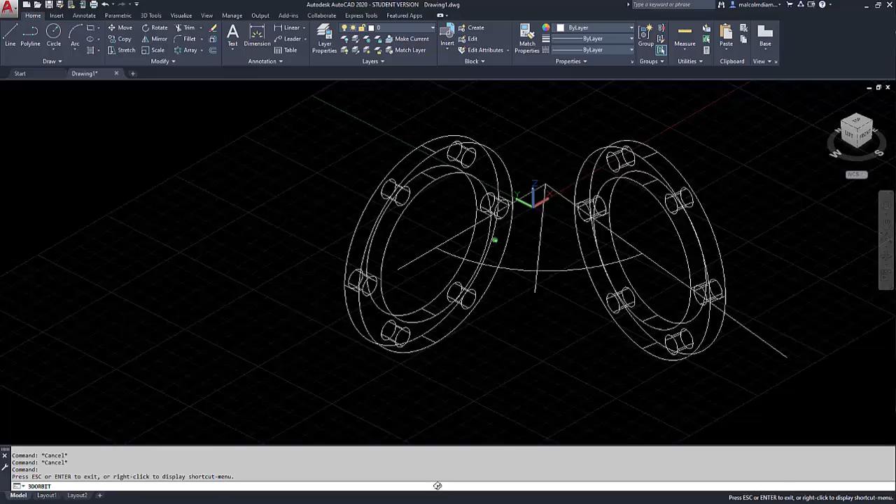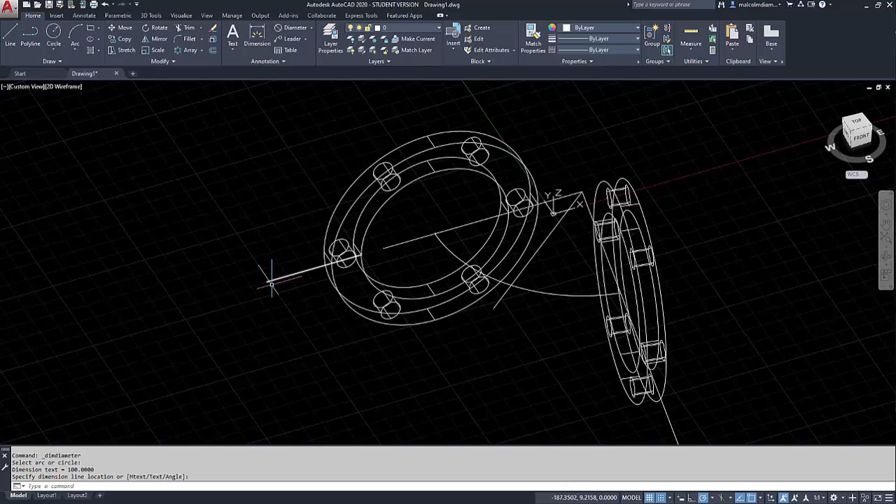Now, because I've not got a drawing to work to, and being an idiot, I did not write down what this thing is, this circle. So I'm just going to do a little dimension on there. You don't have to do this part, that's me being an idiot. What is the inside of that circle? Dimension line location.

100. Right, okay, so the inside of that is 100. So I'm just going to draw. You can just put these things back flat to the screen. It doesn't really matter. In fact, I'm going to do it flat to the screen.

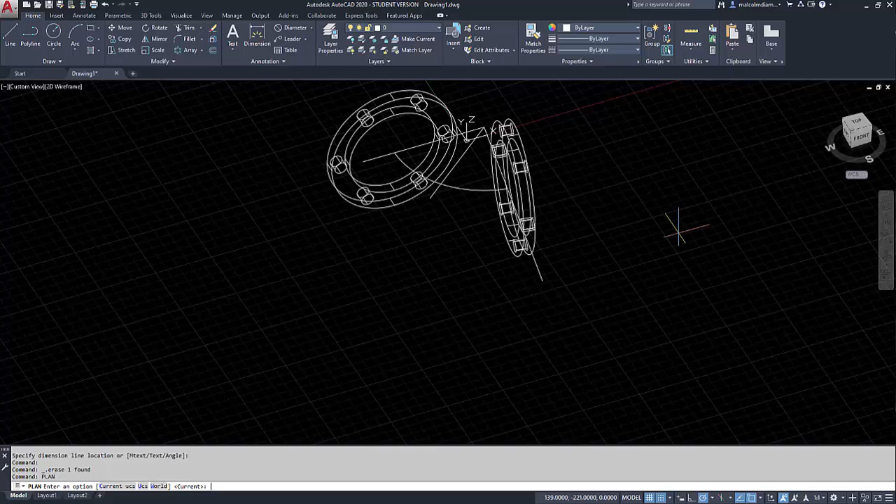If you ever get lost in your UCS and everything else, just type in PLAN, enter, enter. Now you can see something like the handout. You've got your two flanges, they're in position, and you've got this piece of arc, which is the center of your circle in between.

Now, I'm going to make this quite thin-walled because I didn't really think about it much, and I'm just making these numbers up as I go along. So on here, I'm going to move that thing out, and I'm going to do my 50, which is half of 100. All right, so there's my first part of my pipe.

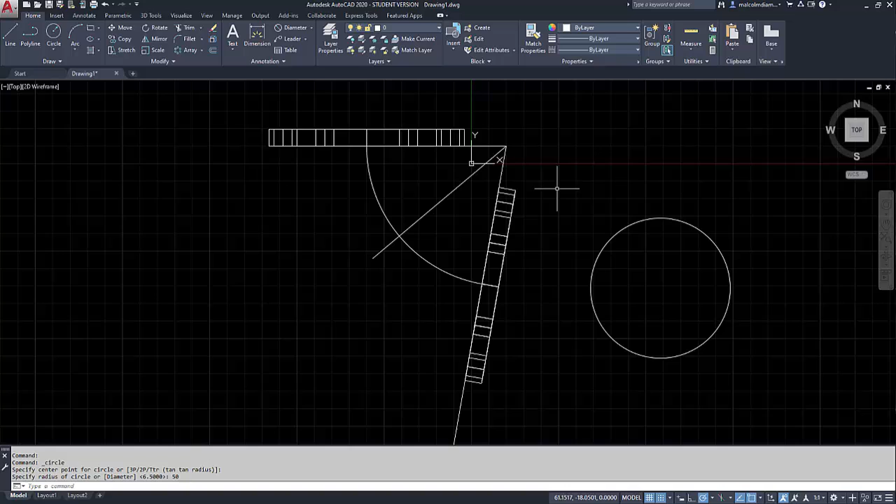And the second part of my pipe, and I might have made these holes a little bit too large. I'm going to put these two big thick flanges on an eighth wall tube. I can do the tube quite simply, see, an eighth wall tube would be 3.2, so I'm just going to do 3 millimeter.

I'm just going to do an offset. I'm going to say 3, then enter. I'm going to left click and I'm going to click again. So you can see my tube is pretty thin. All right, it's pretty small.

Now, how do we get this onto there? Because that's all we really need to do. Then we can get rid of the rest of our construction lines. And basically, apart from a little bit of finagling, we're kind of done, right?

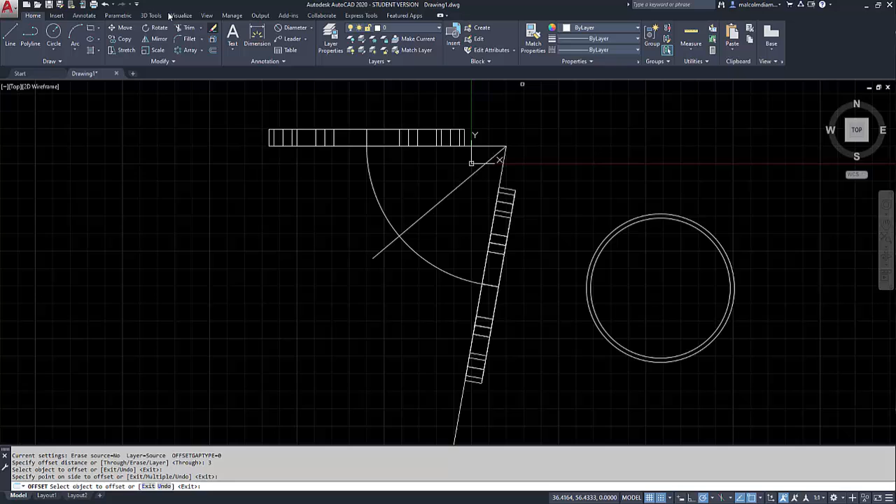So it's an even simpler task. Because I don't know if you remember when we were looking at the sweep command, we were playing around a little bit in one of the classes with the sweep command. That's all we need to do.

We can grab an object, which is a 2D object, and it will be, once it's swept, any shape, and we can path it down an object, which in this case is just that little quadrant that we cut out of our circle, or not quite a quadrant.

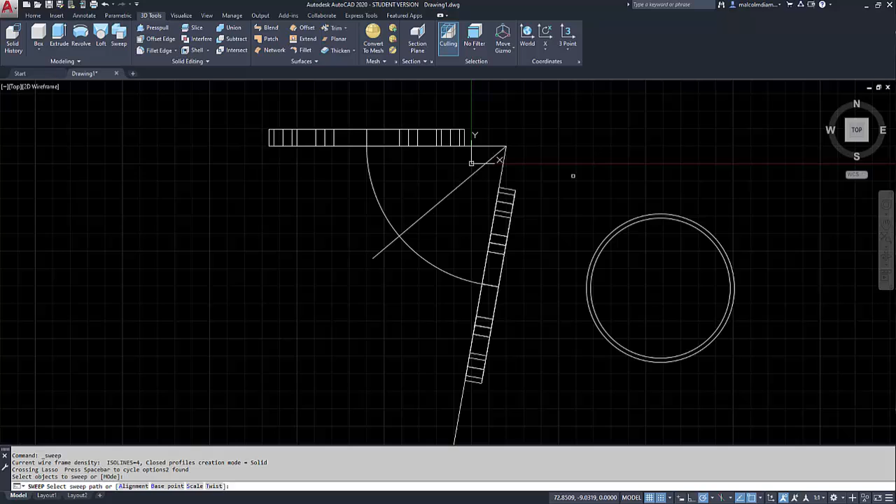So I'm just going to hit the sweep command, and it says select the objects you want to sweep. Well, it's those two. Then I hit the right hand mouse click and enter, and then where is the path is what it's asking for. Well, it's kind of that one.

How simple was that? And yes, it's finished apart from putting a little flange stick out on this bottom edge. Okay, so let me just grab this and turn it around and show you. It really is finished. It's a 3D tube.

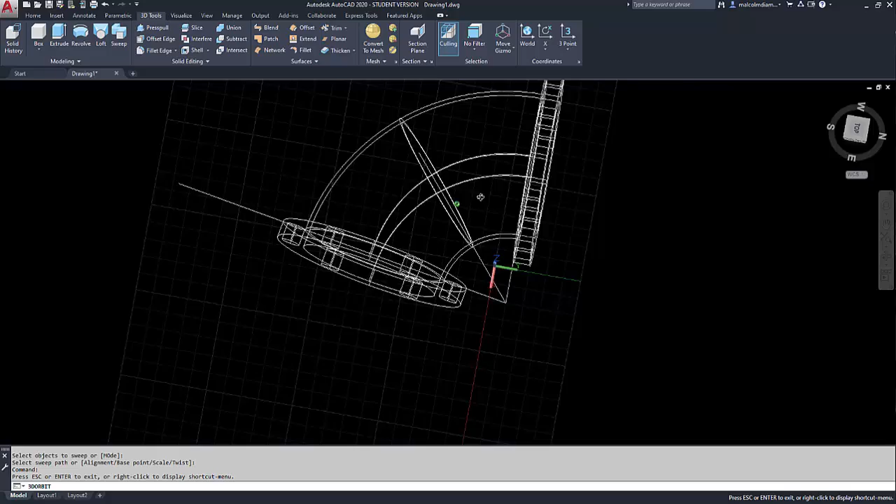The only thing we're going to do is take out the center part. What do I mean by taking out the center part? Well, if you look at it, the outside tube has to have the inner tube taken away from it.

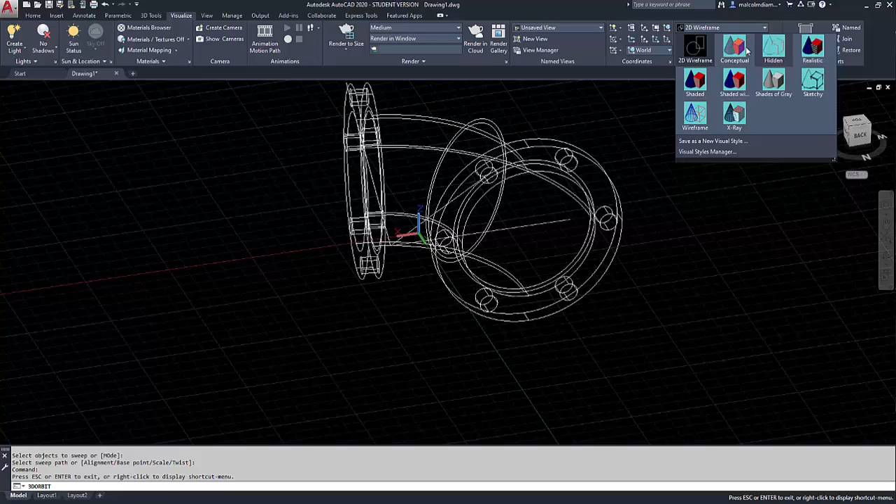So I'm just going to do a subtraction, and let me just put you into visualize first so you'll see what I'm on about. Okay, there is realistic. You can see it's solid at the moment. It's a tube. It's a 3D flanged tube, but it's solid at the moment.

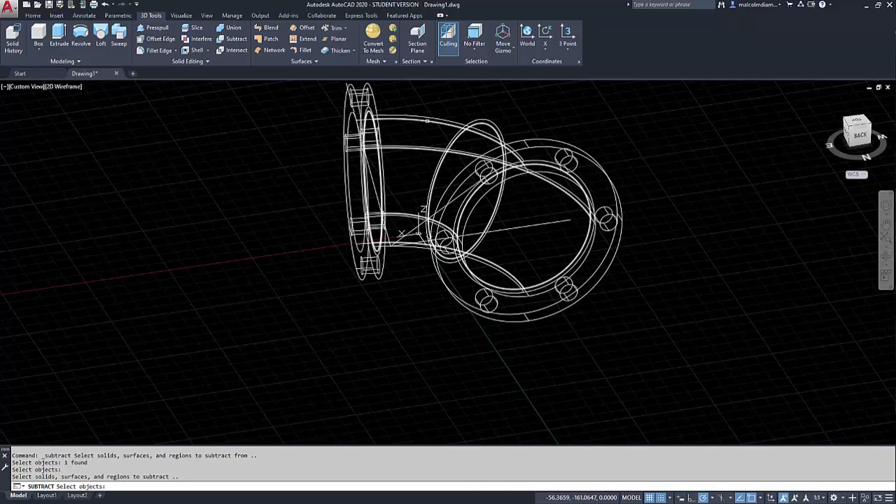So take it back to that. We need to do a subtraction just to get the inside of the tube out of the outer side of the tube. So we do subtract, and we say, right, well, that was our outer edge. Left click, right click, and then left click the inside edge, then right click. Now when you go back and you look in the realistic, we've now got a pipe. We've taken the inner away from the outer, and that is our pipe.

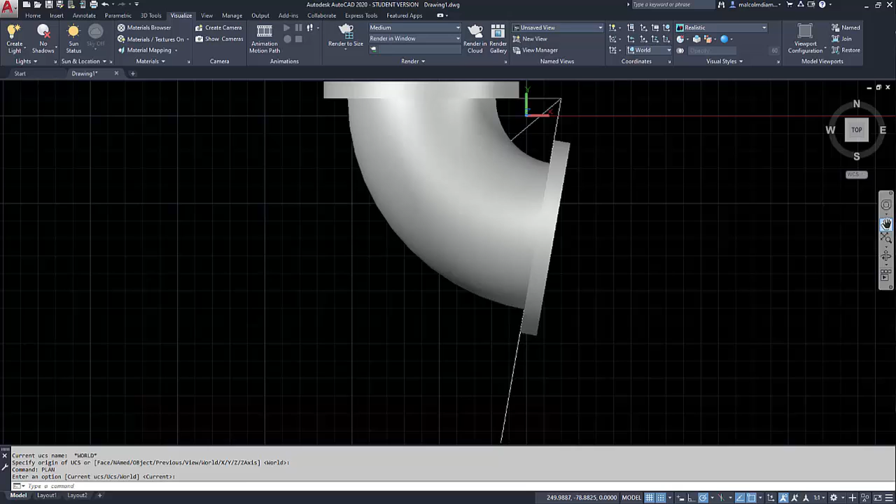Cool, huh? Okay, so now that I've turned it around and I don't know where I am, remember, just do UCS, enter, enter, and that will put us back to the world. Then plan, PLAN, enter, enter. That will give you it back in straight Cartesian coordinates, dead flat to the screen.

We really don't need any of this other workout stuff that we put on there right now, so I can grab that and just delete it. We now have our pipe flange. It's at the degree that we want it. Our pipe is inside of those two flanges. The flanges were mirrored around its center line. And the only thing left to do on that drawing would be regards to that bottom part.

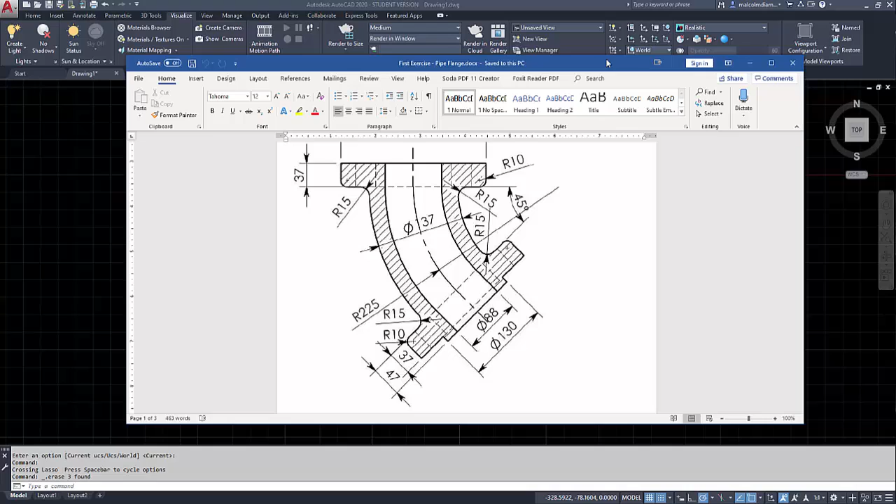By bottom part, let me just move this thing over here and show you. This bottom part here, okay, there is a little step out which has an external circle and an internal circle based on the center of the bottom flange.

So how would you do that? That one, again, is not too hard. Let me just get this thing off of here, 3D orbit, turn it around.

We basically just want to put our UCS on this bottom face. I say basically because I only really want a general direction. So we could use the center of this, the top part of that, and then use the quadrant over here. I normally work with quadrants, and remember with your object snaps, these little things down here. There's your quadrant, and it's the 4 cardinal points of the circle. The outside of that flange is a circle.

So we can use that for positioning in our UCS, like we did when we were doing our dice. Let me just get that off screen. Let me set up the UCS, and you'll see how easy it is. Then I'll leave it, because it's a very long video.

So I'm just going to go down to my command bar, click it, UCS, enter. Now I'm going to use a command which is not on that list. If you remember, it is 3P, which stands for 3-point command. I'm going to hit enter.

Now it's going to say, where is my origin point? Well, it's pretty simple. My origin point, I want to get it right on that center point. Can you see, if I hit the outside of that circle, I get my green center line up? Bing, it's done, right? That's my origin.

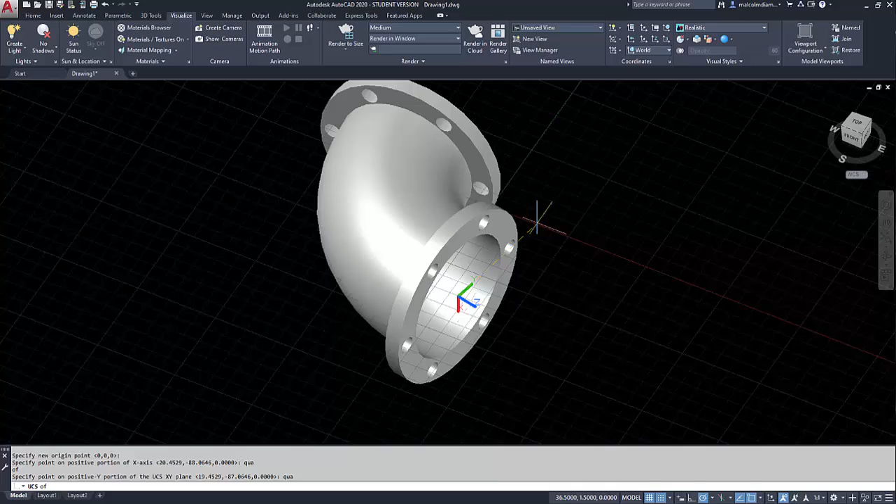So I'm going to use one of the quadrants. I'm just going to type in Q, U, A, enter, go near the edge of that, and there's my X. See the quadrant command? Left click. Now it wants to pin whereabouts that goes in angular. I'm going to go Q, U, A again, come towards the top of that, and bing, done.

Now, I can hear you saying, well, you haven't done the little flange yet. Well, now that you've got the UCS on there, it's as simple as anything. So let me just show you one of the circles, and I'll leave you to figure the rest out yourself, because I don't want to show you everything.

So let me just go back to the home menu, go to the circle, and now that we've got this thing, let me just get to the center point. Bing. There's my circle, and it's exactly the right part, right? So it's right at the right aspect.

So if I do QUA again for quadrant and pick it, it's dead on the inside of that, right? I can do my offset, leave it at 3mm, because that's all I really want on this thing. I can grab my little line there, right click... cannot offset that object, oh, I think I just picked the wrong thing.

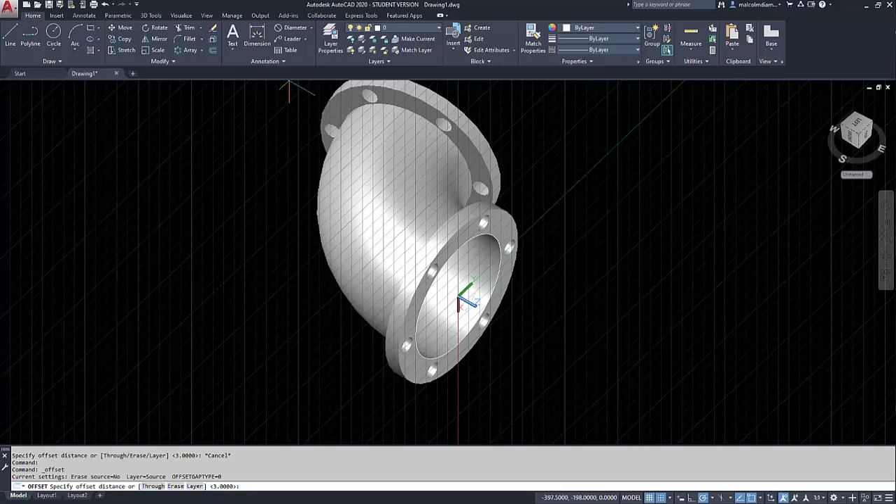You get the general idea. Let me just try to grab... ooh, can I actually grab that? Right, so my 3mm, I'm going to come in... wow, it doesn't like me. Oh, there we go, that one there we go, and click. Right, so I just pushed it out a little tiny bit.

Now I can grab those objects and just extrude them, take the inner from the outer, and you'll end up with a little stubby sticking out on the bottom. Apart from doing that one, remember, whenever you set up a UCS, it's always good practice to save it, so you can save your UCS and restore your UCS.

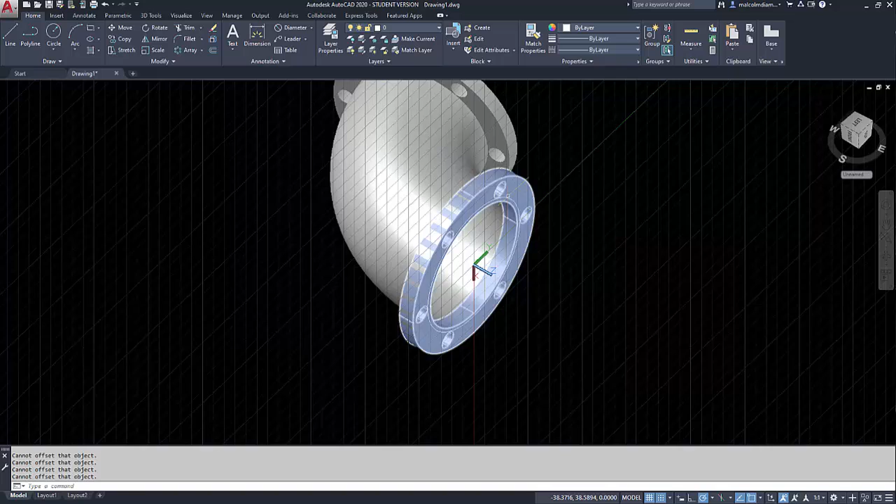Just saying, I've done a little stubby there and unioned it all together. That's one thing we haven't done yet. Let me go to 3D Tools and grab the union command. For now, let me just do this. I'm going to grab that, and that, and my stubby as well. Basically, I would union everything together so it comes up as a solid object.

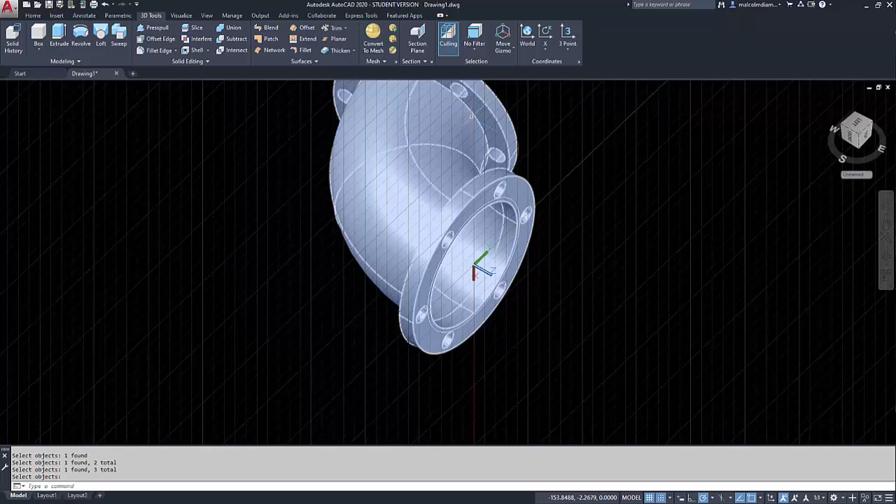Now you can see I didn't put much thought into how big my holes were going to be in my flange, because they're right near this edge. But let me show you something on the actual filleting, because there are fillets on these things. I'll have to put a very small radius on there because I don't want to go too much into that hole or it might object to it. Basically, you can fillet a 3D object just the same way as you can a 2D object. Let me grab the fillet command, and yeah, they are very, very close, which is a pain, but let me grab it anyway.

I'm going to grab that line. So I just left-clicked on that flange. I haven't got a radius set up yet. It says enter fillet radius. I'm going to do something silly like 0.2, right? I know that's a ridiculously small radius, you probably won't even see it, but I put my holes in the wrong place, all right? Then I just hit enter. If it hasn't picked the whole circle, which it has, I could hit chain and then pick the other parts of the circle, or I can just hit enter again.

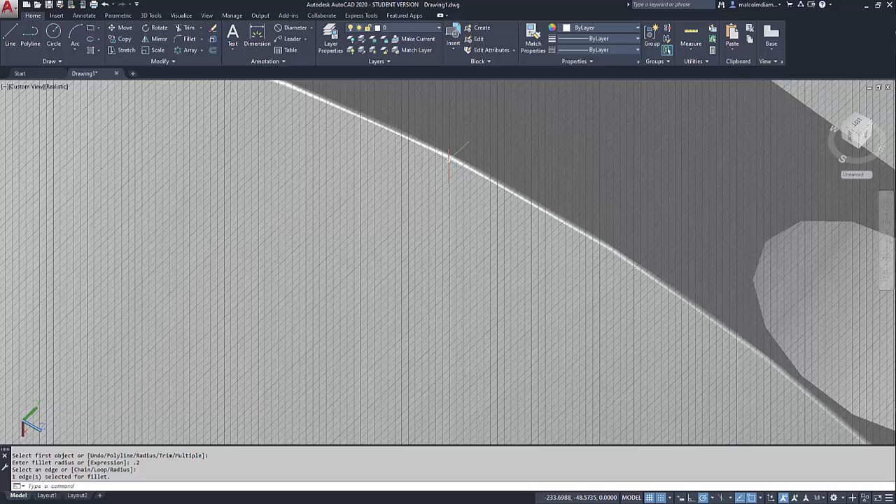Now I know that, see, it's a rad, right? So if you've already got your rads on your flanges and you want to put holes in there, make sure your holes are small enough that they're not going to interfere with the radiuses. But I also understand there is a rad on the outside of this thing too, so let me do that again, this time not with a ridiculously small fillet radius.

I'm going to do one a little bit bigger. Let me grab fillet. I'm going to take my R, enter. I'm going to make that, I don't know, 2. I'll make that 2, so I've got a 2 rad. I'm going to grab that line there, which is the outside of my object, enter, enter, and hopefully you can see it. So that's how you would put your radii on that are required on the flanges too. Obviously position your holes a little bit better than I did, so think it through first. But basically, yeah, that's it.

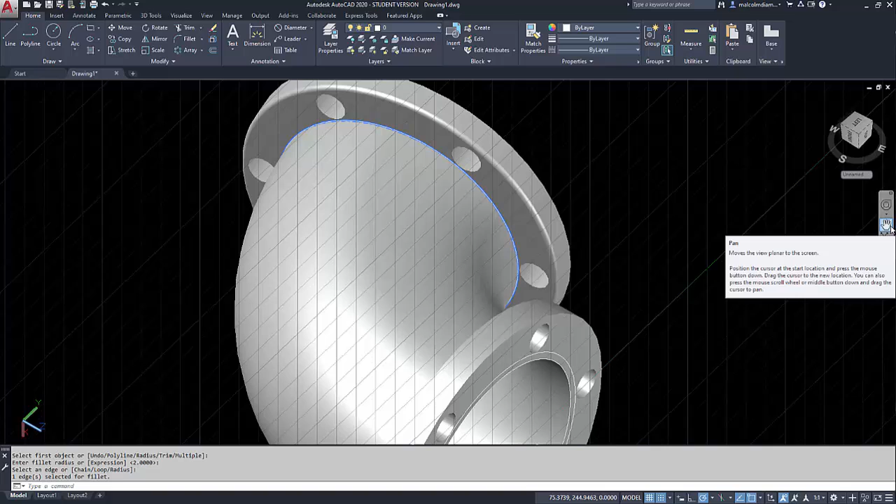That is a brief explanation, even though it's nearly 30 minutes long, on how to use the sweep command, a recap on the array command, and how to work with the UCS and apply things like the little flanges and things you'll get on the bottom.

Well, I hope that helped. That's the video for this week. The 2D drawing you shouldn't have too much of a problem with, I don't think.

The 3D I just wanted to cover. And on the second one, which is the pivot plate, it's very much like a lot of the other exercises where we're extruding into and out of the cutting plane, the drawing plane. So you just extrude your bosses up, and extrude the base body down, and the rest is just adding fillets. Remember that the chain command is there if you need to chain the edges of a fillet together.